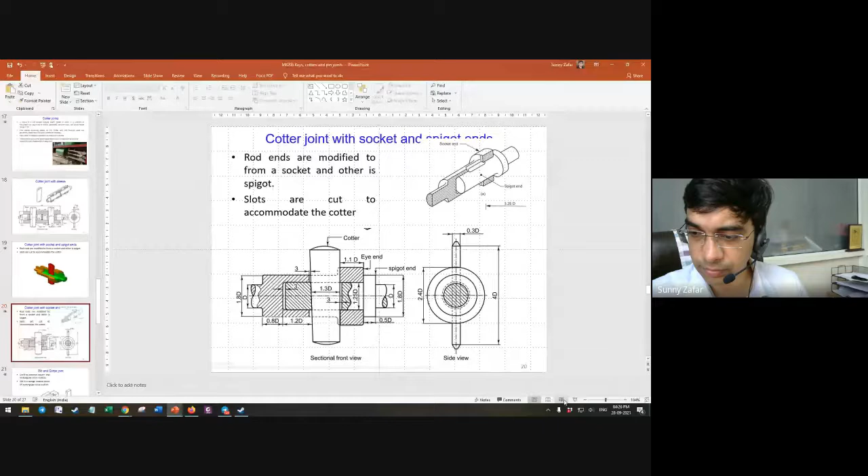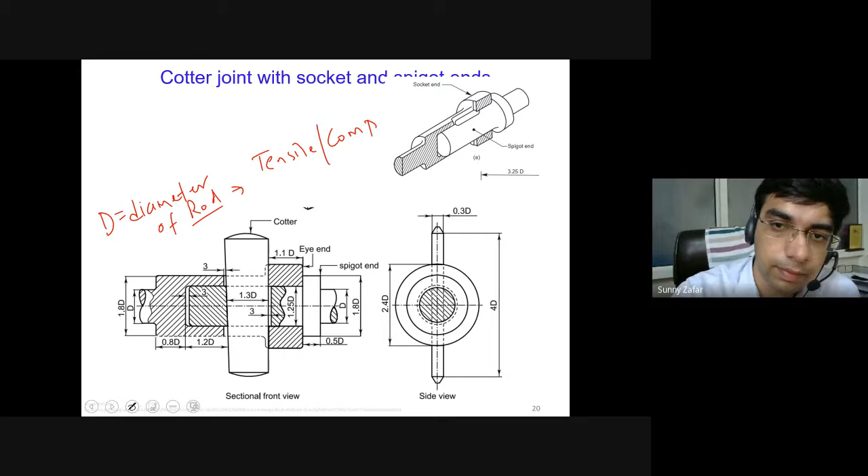Yes, sir. Okay. So what I was saying is that all the dimensions of this are based on the diameter of the rod. Please be careful what terminology I am using. I am not using the terminology as shaft, but diameter of the rod. And rod will only transmit tensile or compressive forces, not torque, no rotation. Nothing is possible with this.

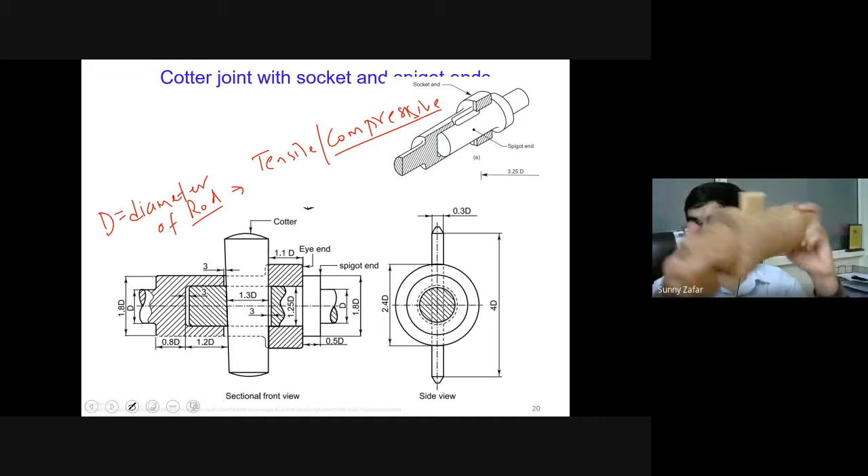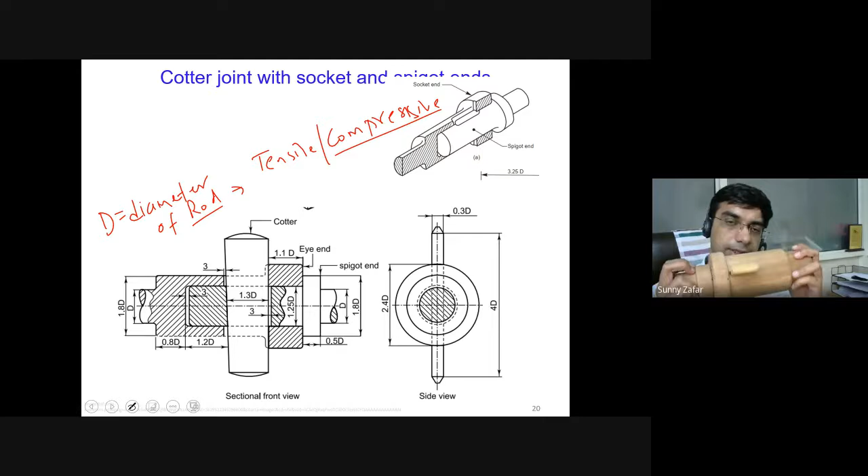So you may be wondering why it is not possible to transmit rotation. So what can happen if I rotate this at very high speed? If this is rotating, there may be a moment when this cotter can come out. Although we have locked it, under the influence of high speed rotation, the centrifugal force, because of the mass of this cotter, it may come out, and that may cause the joint to open up, and that may lead to some catastrophe, some damage, some accident. So that is why it is only suitable for pull or push type of loads.

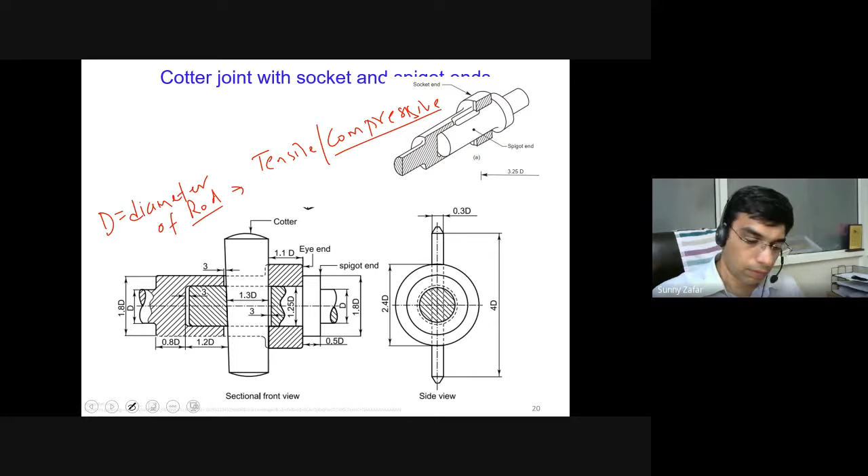Rotation is not possible with any of the cotter joints, because locking is with the cotter, so it is not possible to have rotation with this type of joints. So again, just coming back to the machine drawing part. So this is an assembly drawing in which all the dimensions will be calculated based on the diameter of the rod. And again, you will be drawing the isometric view, projecting it for this sectional view and the side view.

And all these dimensions, if you are given the exercise or the question is to draw the cotter joint with socket and spigot ends, all these dimensions should be projected. So if the diameter given is 40 millimeters, I should see here the extension of this spigot mentioned as 20 because it is 0.5d. Similarly, I will see that all other dimensions are mentioned in the proportion as standardized here in this machine drawing.

So if dimensions are missing in your final PDF, if it is assignment or exam, there is a likelihood that marks may be lost because the dimensions cannot be confirmed. So some dimension marks may be lost even if you have drawn correctly, but it is not showing in your drawing. So please consider this aspect very seriously, that all the dimensions should be properly visible in the drawing. If dimensions are not visible, it cannot be confirmed, so dimension marks will be lost.

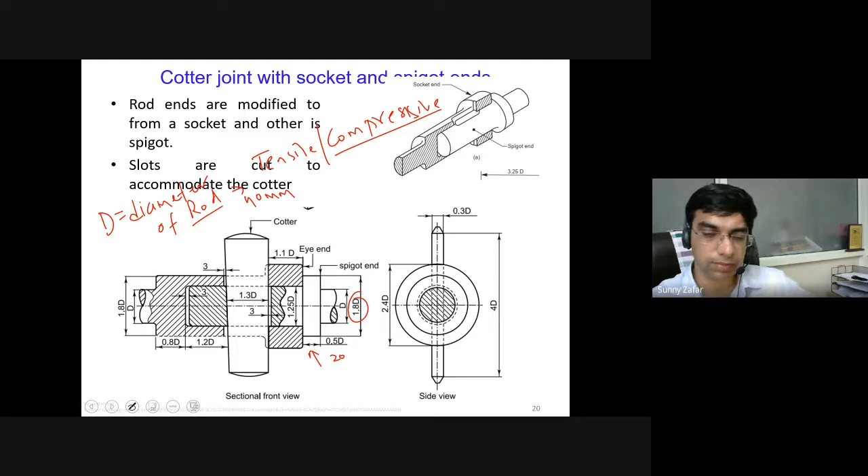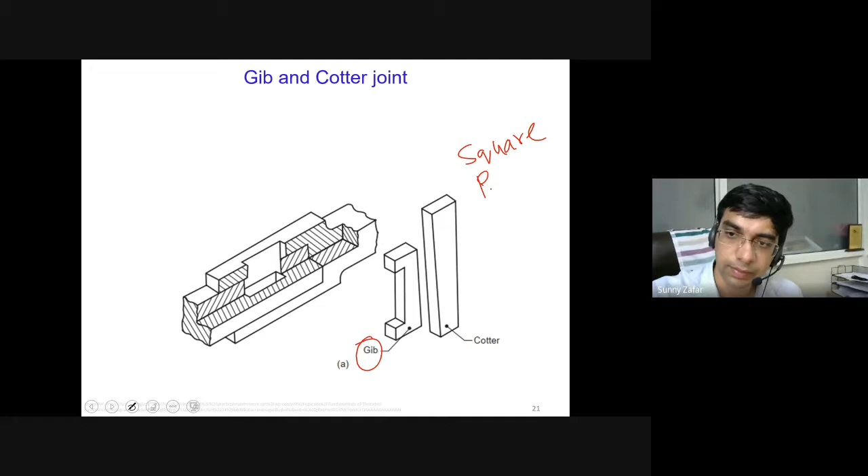Next is the gib and cotter joint. In this case we are still using that humble cotter, but we also have its friend, that is the gib. Now what is the difference in this joint? So this joint can hold square rods. It may not be necessary that every time the rod has to be circular. There can be an instance where the rod is other than circular, especially a square rod. So in this case, it is somewhat like the spigot and socket joint, but it is with the square rod.

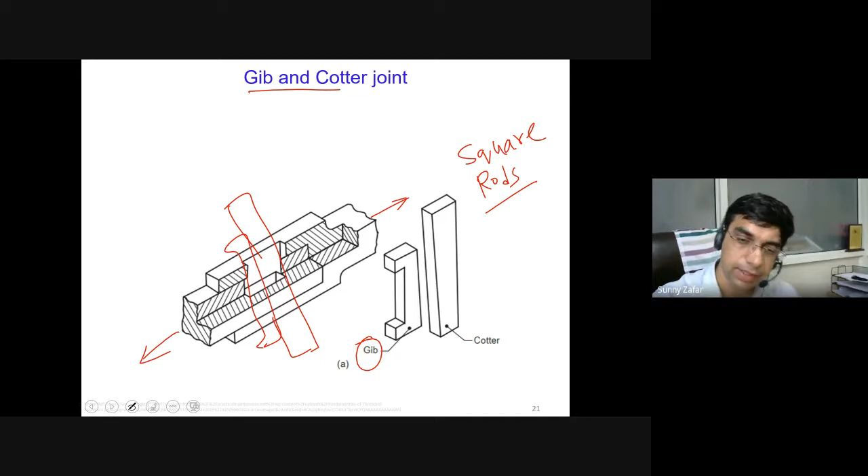So we have this gib here and the cotter. In this combination, the gib will come here, and the cotter will be coming at the back of it. I will show another view of it. So this again is suitable only for tensile or compressive forces, not suitable for rotation. This joint is specially useful for connecting square or rectangular cross sections, not circular ones. So what is a gib? A gib is a wedge shaped piece with a rectangular cross section. So this is how the gib looks and how the cotter is there.

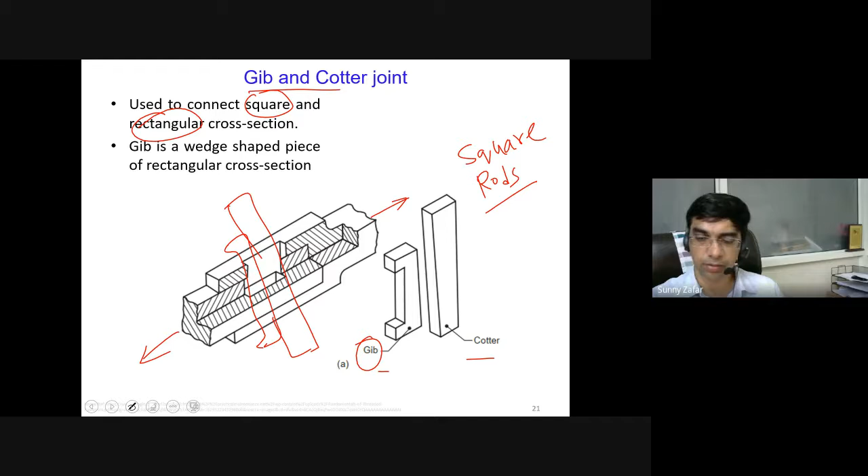Now if you see this arrangement here, this is rod 1, this is rod 2. Again, the ends, especially of rod 2, are modified to accommodate rod 1. And there are these slots cut here to accommodate the cotter and the gib.

Now, what happens here whenever there is this tensile load coming over? This gib is important here to lock the cotter. If we don't use the gib here, even if the slot may be small, the proper gripping of this rectangular or square surface cannot be done alone with the cotter.

So the gib has this C type of shape. If you go back to the slide, it has this C type of shape, which enables it to hold onto the surface. Maybe the slot is only up to here, but this extended surface of the gib will be holding it over here. The cotter and gib will have a significant amount of friction between them, which is locked with the tapering of the cotter, and this will help to keep the gib and cotter in place.

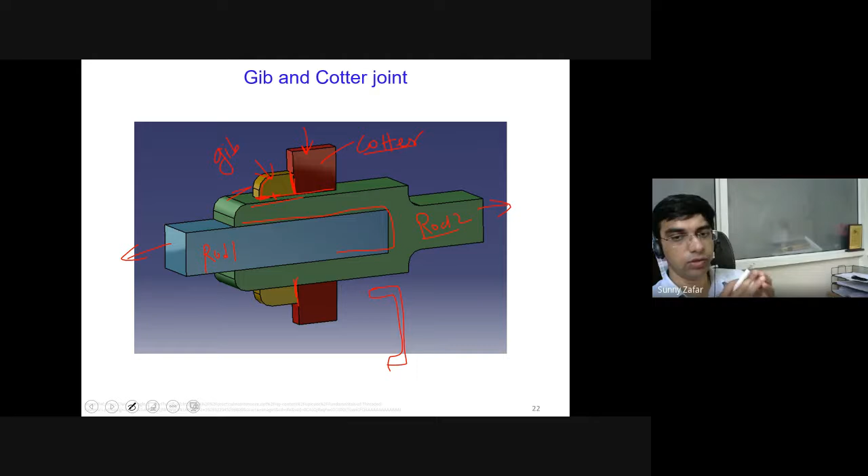What is important to understand is that the gib and cotter joint is only suitable for square or rectangular cross sections, not for circular ones. This joint is again based on the dimension of the rod. In this case it will not be the diameter, but the side of the rod, mentioned here by D, and the small square indicates the rod is of square cross section.

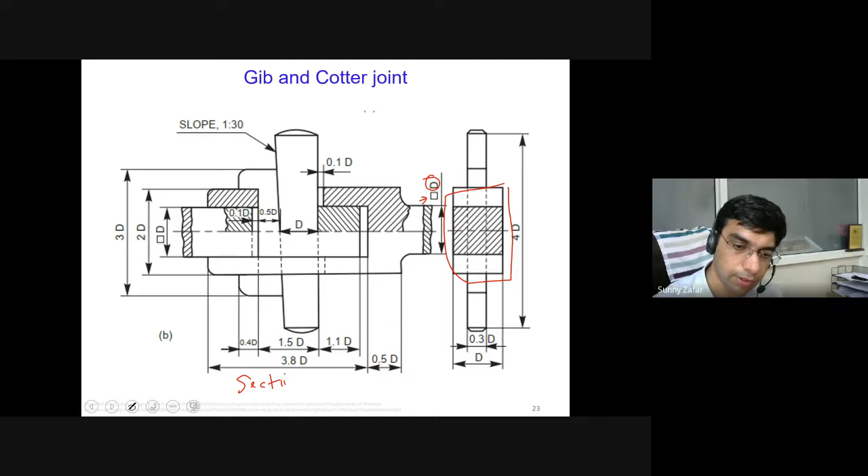That is why in the cross section, since it is square or rectangular, you can see this type of projection in the side view. So this one is the sectional view, and this is the side view.

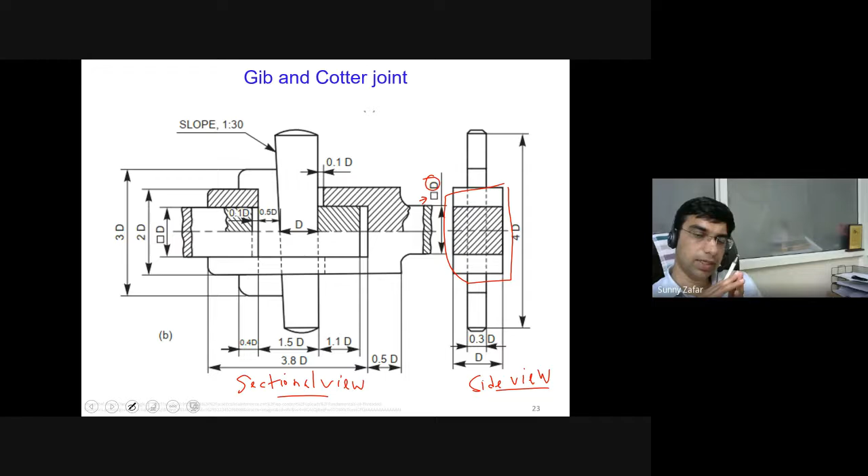All the dimensions again are empirical, so based on this you will be given a question to draw a gib and cotter joint: draw the sectional and side view of the gib and cotter joint for connecting a square rod of side, say, 20 millimeters. Based on this 20 millimeters you will calculate all other dimensions as per this standard drawing.

Next is the pin joint. The pin joint is again a very important joint from the aspect of engineering applications. This type of joint can also accommodate slight movement of the shaft. I will show you the actual model also. I have a wooden model again, however I lost the other part.

What you see here is the pin. We call it the knuckle pin, as shown here. Below, there used to be a collar, which is again missing in this case. And then there is a taper pin. This is the taper pin here. The other end of the rod will come in between.

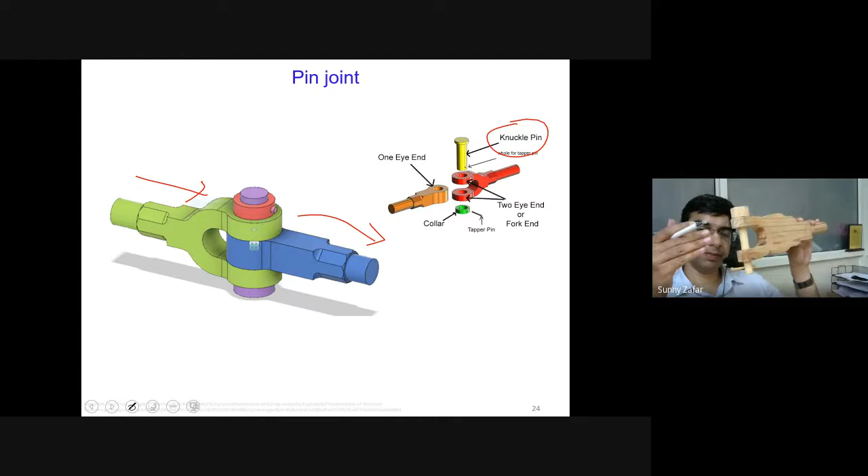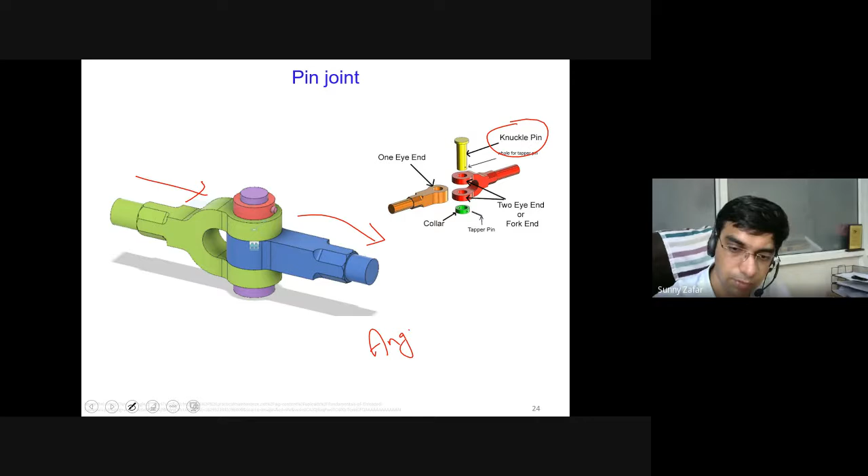You can understand that even if the rods are not aligned and there is a small angular displacement, this type of joint can hold in its place. This angular variation could not be accommodated with the other types of cotter joints we discussed previously, like the sleeve joint. But here a small angular movement, not very large, between the rods can be accommodated.

So this can be done, which was not the capability in the previous. So this is also an assembly here, where you have the fork end. So this is what I had with me. This is the fork end, which has this type of two ends. Okay. So then I have this knuckle pin with me, and the knuckle pin has a hole below where you will be locking this with this taper pin.

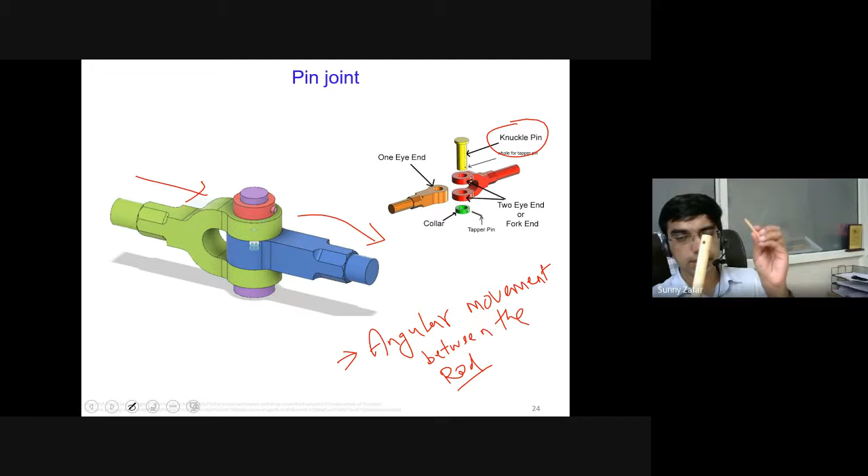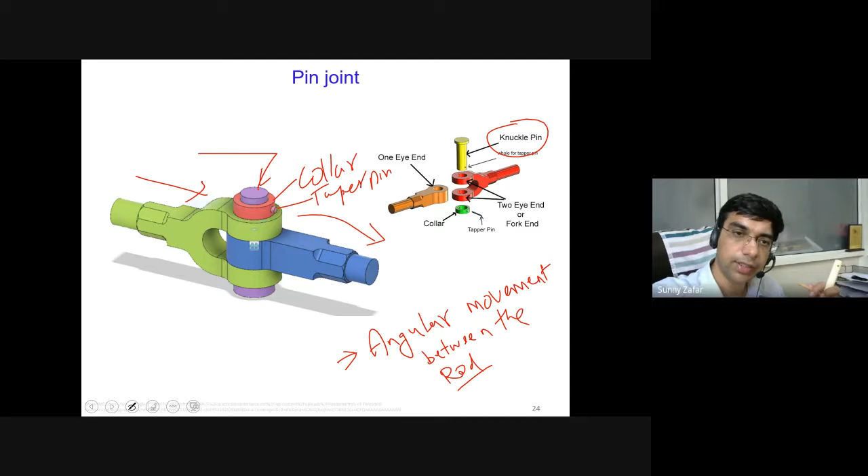Of course, there is in between the collar, which I don't have currently to show you, but there will be a collar as shown here. So this is the collar here. Okay, this is the taper pin, and of course this is the knuckle pin. Again, this is rod 2, rod 1, and slight angular variation is possible. So one rod will have the fork end, the other will have the eye end. So these are technical terms.

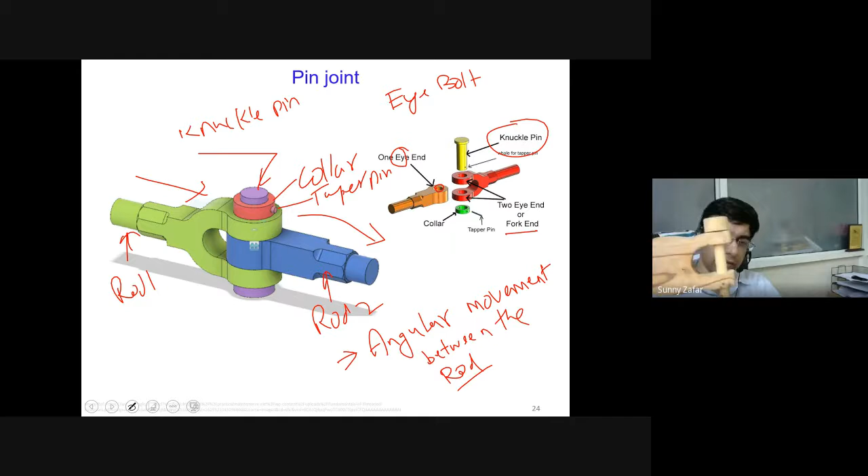So if you remember, we had read about the eye bolt. Okay, so this similar type of eye or the slot is present, through which I can pass the knuckle pin. Okay, and then, of course, a collar will come and I can lock this with this taper pin. So now slight angular variations are possible in this type of knuckle joint. So this is sometimes known as the knuckle joint, or it is also known as the pin joint. Why the pin? Because the knuckle word and the pin word, either they are used together or sometimes only pin or knuckle, but it means the same thing.

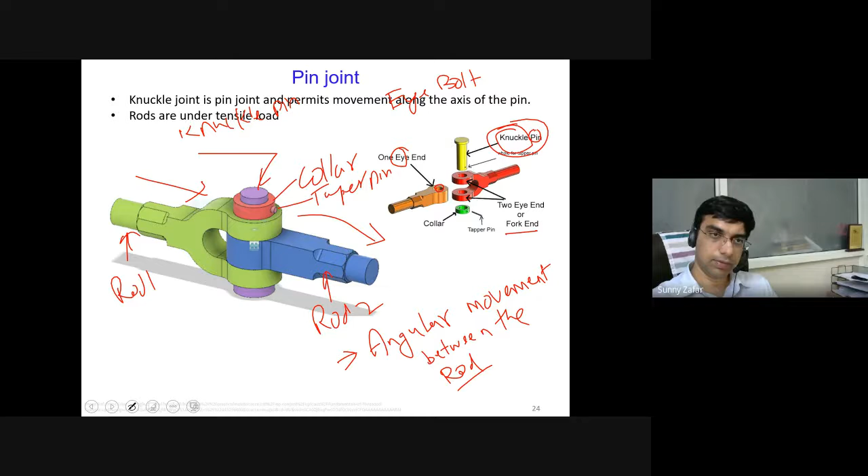So it permits movement along the axis. Okay, and loading is purely tensile. So this is only tensile loads, not compressive. Again, you can understand if this type of thing rotates, there is a possibility that this may not stay, and it may open up. And it is more flexible in adjustment compared to the previous cotter joint. So no cotter is there, but we have a pin in this case.

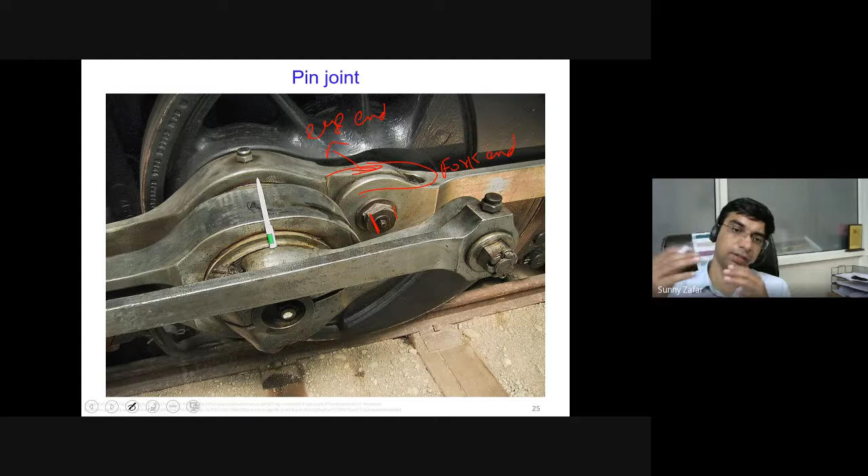So this is the actual photograph of this knuckle pin joint. So you see this and this one. So this becomes the fork end. Okay, and here this is the eye end, and in between, of course, the pin is there. This is the photograph from Wikipedia, I took it. So if it is quite heavily loaded, you would need a separate arrangement to lock it up. And you can see the extent of this pin joint. So this is a standard ballpoint pen. So you can see how big these joints can get.

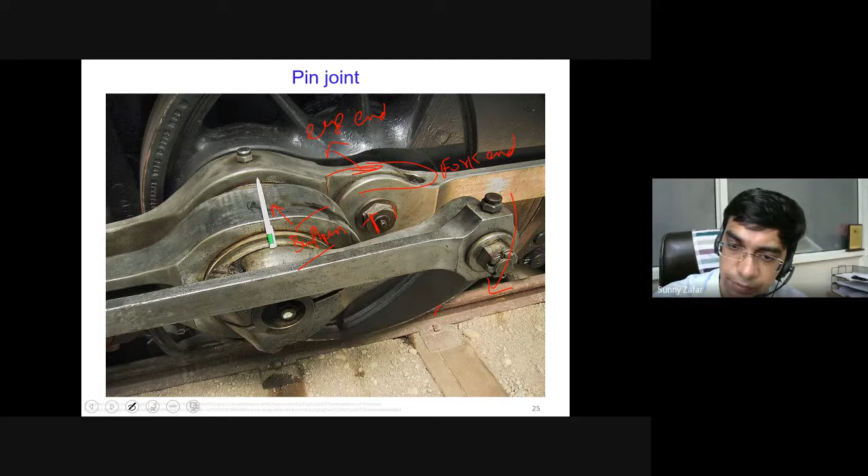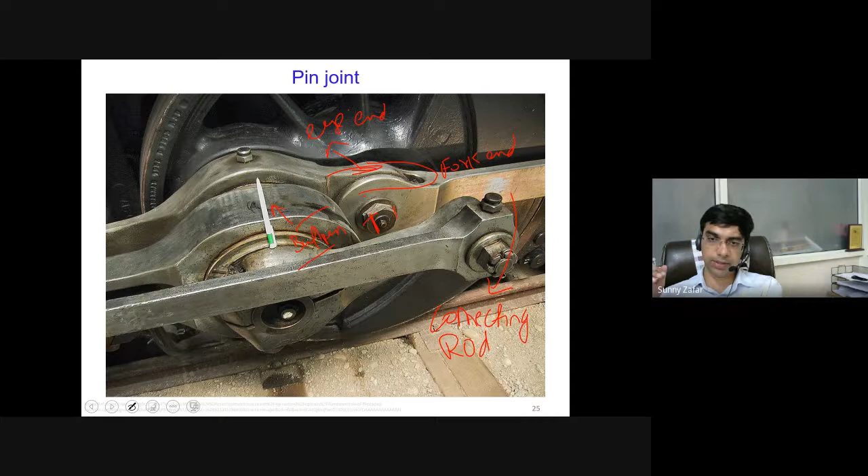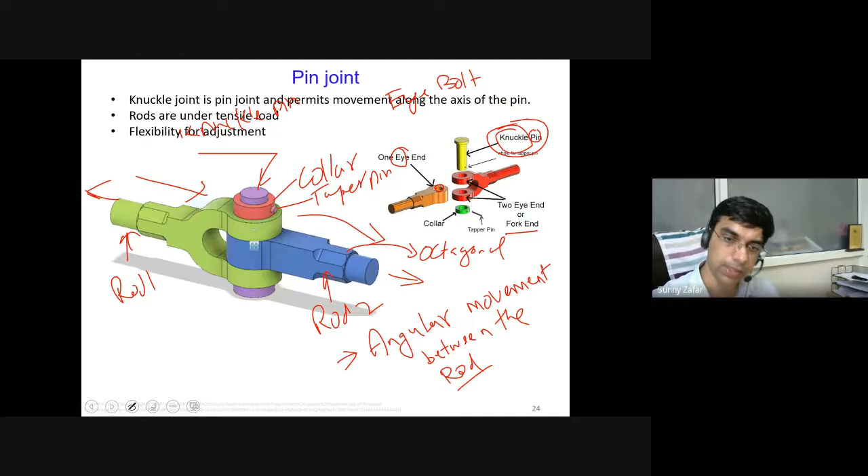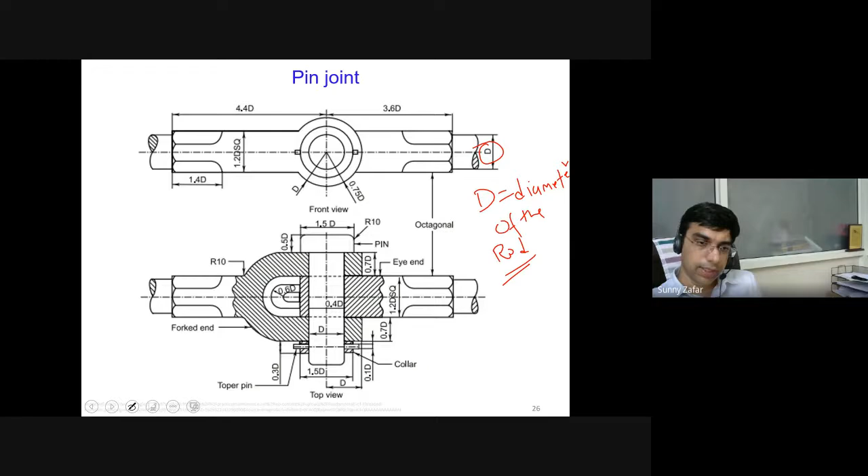Another important aspect in this is that the surface here, in the actual one, it is octagonal. So this is octagonal surface. Means eight faces are there, not sides. So this octagonal thing is there on both the ends, that is the fork end as well as the eye end. And correspondingly you can see that various parts are hatched to show the cross section of two different rods, and of course other lines are present.

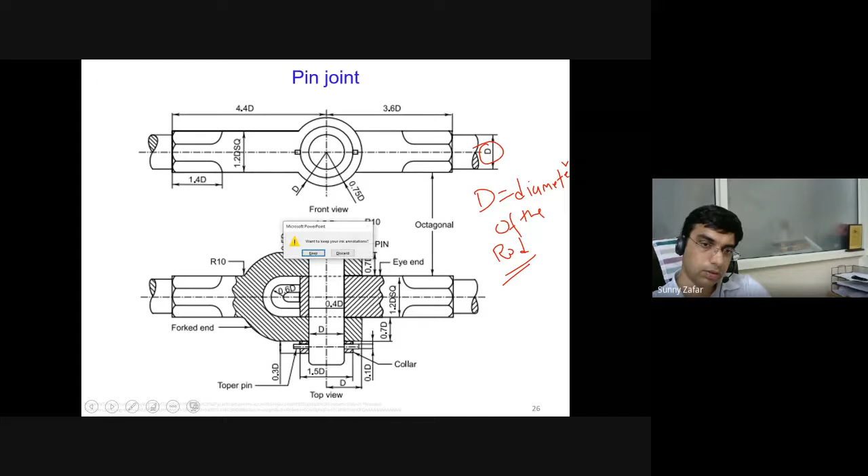So what is important here is that you clearly mention the dimensions, whatever you have done in the calculation. That will be the main thing in assignments. If you have not done it in the submitted assignment, please make sure in the assignment that you will be submitting now, dimensions are clearly marked as per requirement. So this is all based on the joints, keys, cotter joint, etc. We can have now some questions from you based on today's class.